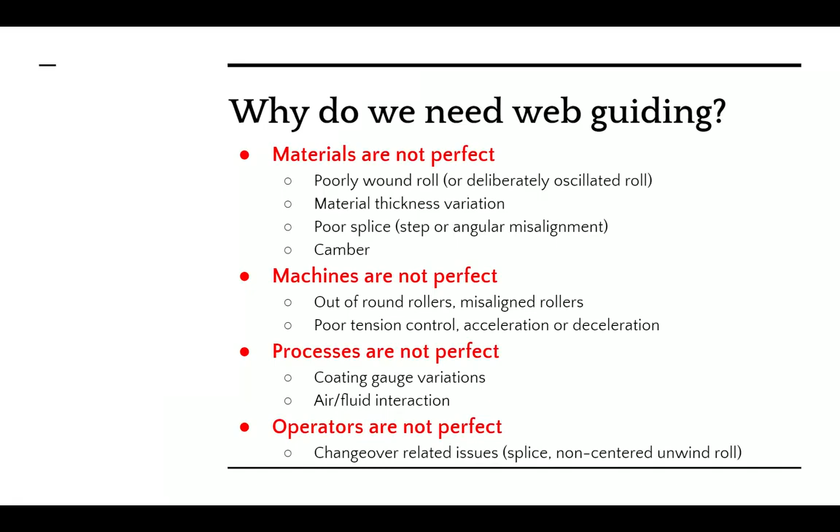Finally, operators, mainly when they are splicing the web or when they are putting a new parent roll into their roll-to-roll machine, they may not center it, or they may not put it at the right location. That might also cause an issue, and that might need web guiding. So web guides are necessary at different locations of the machine, because you might need alignment at different parts of the machine.

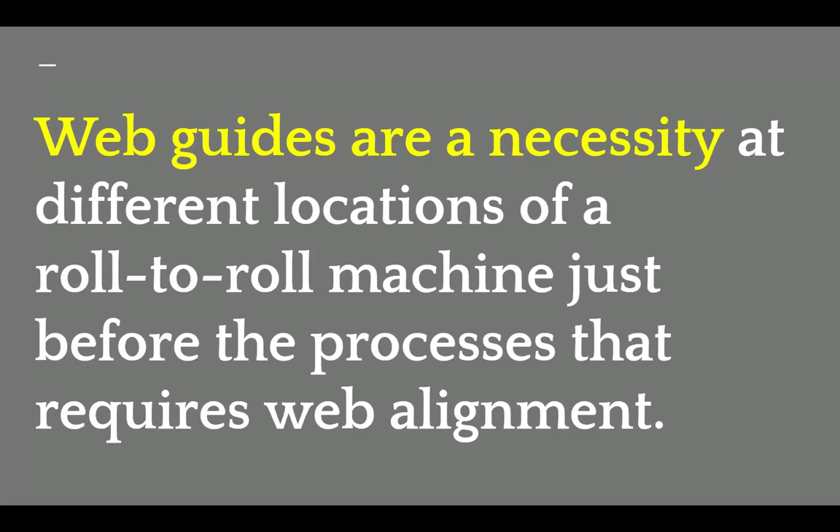That's the main thing with web guiding - you have to put a web guide in front of any process that requires web alignment. Just to give you an example, let's say you are laminating something, and you have two layers of web coming into this lamination process. At this point, you would need a web guide so that you can align this layer and this layer with respect to each other. The guides used within the machine are called intermediate guides, or intermediate to the machine.

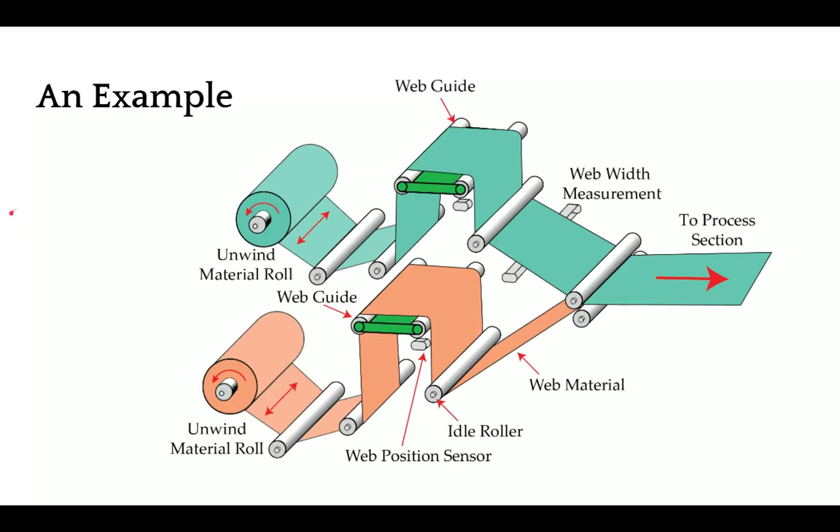And the guides that are used at the entry and exit of the machines are called terminal guides. So we're going to look at all of these in detail, but that gives you an idea of why we need web guides and where we need web guides.

In terms of the location, when you have a web guide that is located at the entry and exit of the machine, they are called terminal web guides. There are lots of names for these, and some of the common names are shifting stand, shifting base, shifting sidelay, or roll positioning stands.

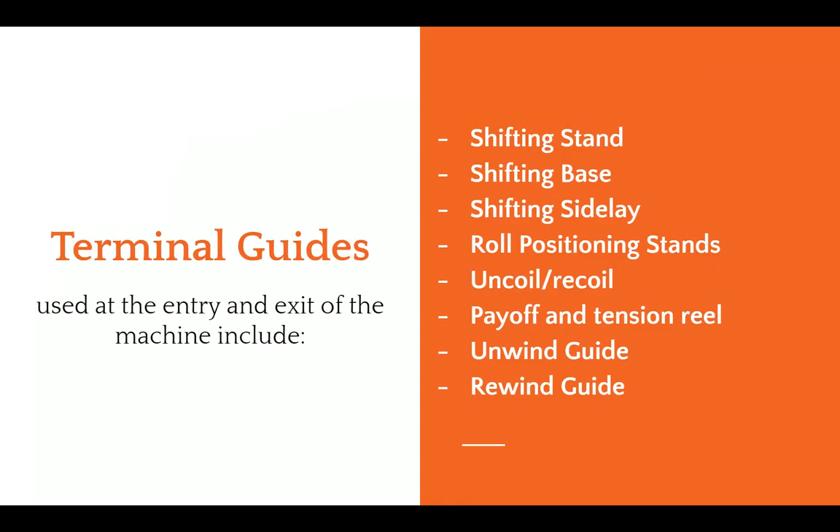If you're in the metals industry, it might be called uncoil or recoil, and in other industries, it might be called payoff and tension reel. Specifically in these presentations and in our terminologies, we call them unwind and rewind guide. An unwind guide is at the entry of your roll-to-roll machine, while a rewind guide is at the winder or the exit of a roll-to-roll machine. So these are some of the terms used for terminal guides.

In terms of intermediate guides, these are the web guides used within the process, within the machine. There are certainly multiple types of these web guides, and the most common one is what is called an offset pivot guide. Other names for offset pivot guides are displacement guides, positive displacement guide, pivot frame, or table guide. The second most commonly used intermediate web guide is a remotely pivoted guide.

That's a technical term, but most commonly it's called a steering guide, steering roller, or swivel roller. And then there are other less common web guides like end pivoted guide or center pivoted guide, and even turn bars are all available. We'll take a little bit deeper look at all of these different kinds as we go along in this presentation.

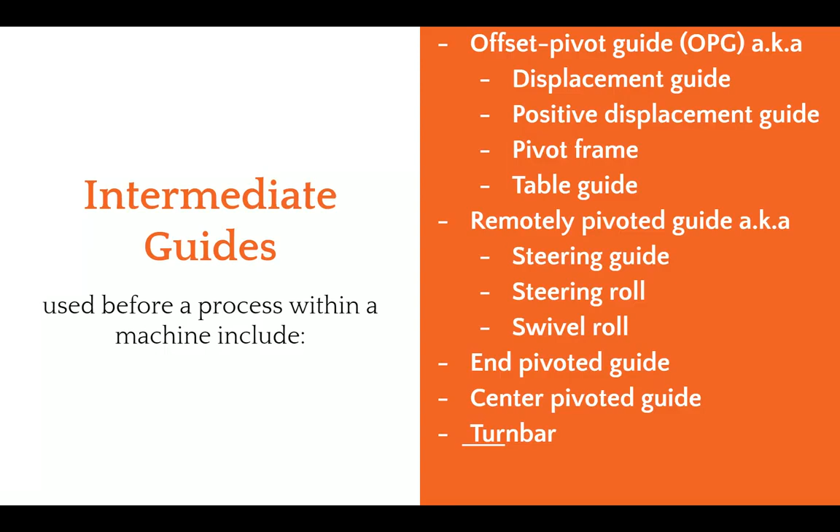But most of these web guides work on a basic fundamental principle, and that is what we call normal entry. So what does normal entry say? Normal entry is basically that a web approaching a roller will always align itself perpendicular to the axis of rotation of the roller. As you see in this video right here, let me restart that.

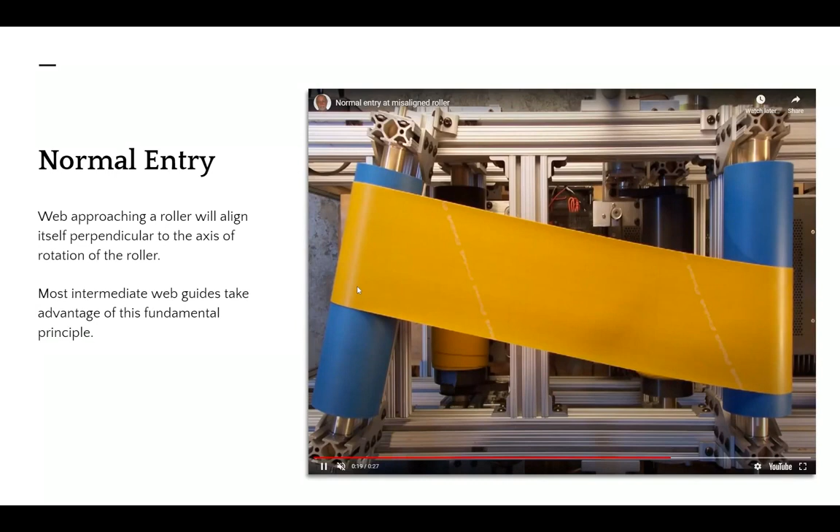As soon as the roller on the left has a misalignment, the web started to track and it started to move in such a way that it will approach the roller on the left perpendicular to the axis of rotation. This is the fundamental principle used in most of the intermediate web guides that we are going to see. What's happening here is that the web is essentially behaving like a beam, and the angular displacement on this left hand side is bending the beam, and that's what is causing the web to track to this side.

There are lots of dynamics involved in this process. How fast the web moves, how much does it move? All of that depends upon the transport conditions, what type of web it is, what kind of traction you have, and things like that. And obviously, the static behavior is that at steady state, once this angle is set, how much is it going to move? Are we going to see any movement on this side?

As you can notice, when this web moved, the upstream roller, the web was still there. It was maintaining there because it was able to have enough traction so that the lateral forces or the moment that is acting there was not able to make the web move.

And whenever we have a motion like this, bending occurs. Bending in turn means that there are stresses developed in the web. So you're going to have a tight side and a slack side, and there's going to be a tension profile here. So these are important to understand for us in order to have a successful web guiding application or execution of a web guide.

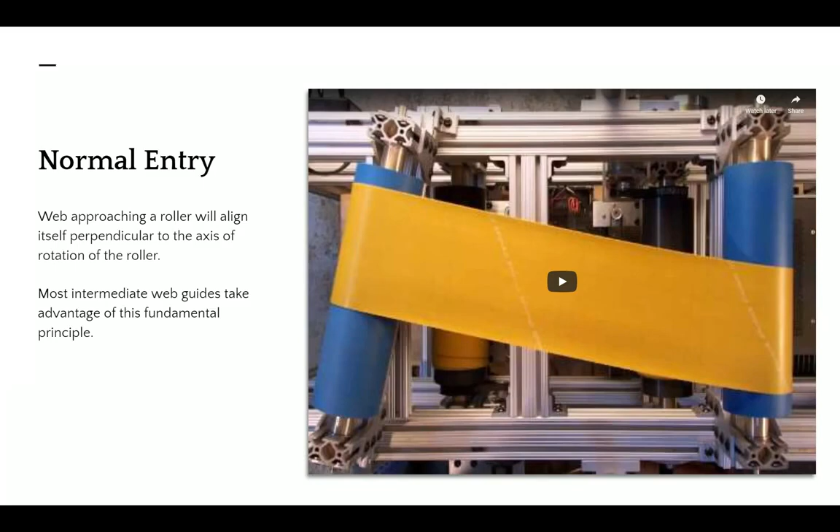So in terms of a basic web guiding system, we are mainly dealing with four main items. Apart from the web, we're mainly dealing with four main items.

One is the guide structure or the mechanism. This is the device that is actually making contact with the web, and that's the one that needs to be moved, or it moves the web. There are different types of guide structures that we will go through.

The other component of a web guiding system is an actuator. So an actuator is something that takes an electrical signal and then converts that into physical motion so that it moves the guide structure so that the web can be located at the desired location.

The third and one of the most important components of a web guiding system is a sensor. The sensor is the device that provides the feedback. The sensor is the one that tells us where the web is, meaning it's inferring the position.

And then finally, that signal is sent to a controller. The controller is mainly the intelligence or the brains that takes that sensor signal and computes the corrective action that is required so that the actuator can move the guide mechanism to the location where we can get the desired web position.

Again, another schematic of how the components of the web guide are. So the web is a part of the web guiding system, and then you have the mechanism. There's an actuator inside the mechanism. The sensor gets the position feedback of where the web is, sends that information to the controller. The controller then computes an error and it sends the command to the actuator so that the mechanism can be moved to position the web at the right location. So this is a closed loop feedback control system that is a main part of a web guiding system.

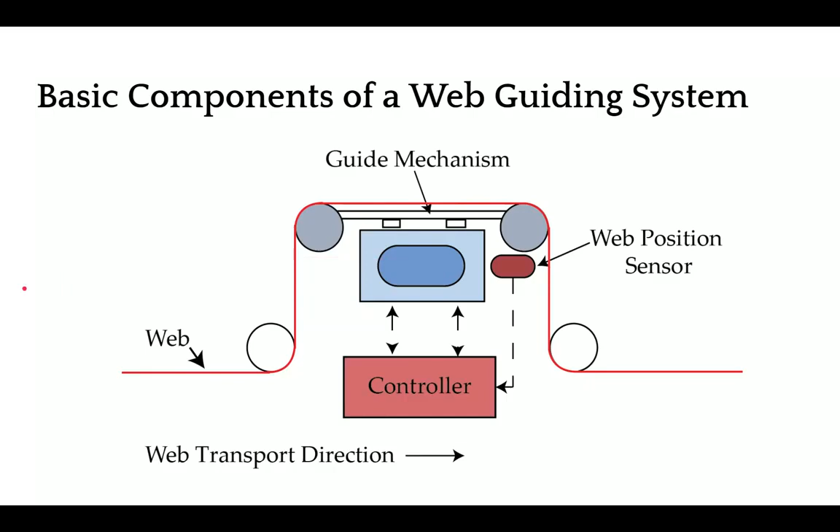So let's dive into detail about different components of the web guide. First, we'll start off with guide structures and look at how guide structures are with different types of web guides that we saw. So first and foremost, we have the unwind web guide structure.

In this case, you have a parent roll, and that is feeding the web into your machine. And this roll is on a shifting stand or a base that is supported by typically linear bearings. And then there's an actuator there that connects the moving stand with the fixed base. And then there's a sensor here that is looking at the position of the web.

So the main objective of an unwind web guide is to ensure that the web that is fed into the process is at the desired location. And because of that, you have a fixed sensor that is fixed to a machine frame. And then this stand actually moves in and out of the monitor that we have here. It's going to go in and out. And the feedback from the sensor is used to make this unwind guide move in and out so that it can position at the right location.

One thing I wanted to point out is that there is a shifting idler. When I say shifting idler, it means that this idler is attached to this moving base. The main reason why we do that is that if we put a sensor right here, it is not an ideal location, just because of the fact that when the diameter of this roll changes, you're going to have the web plane go in and out.

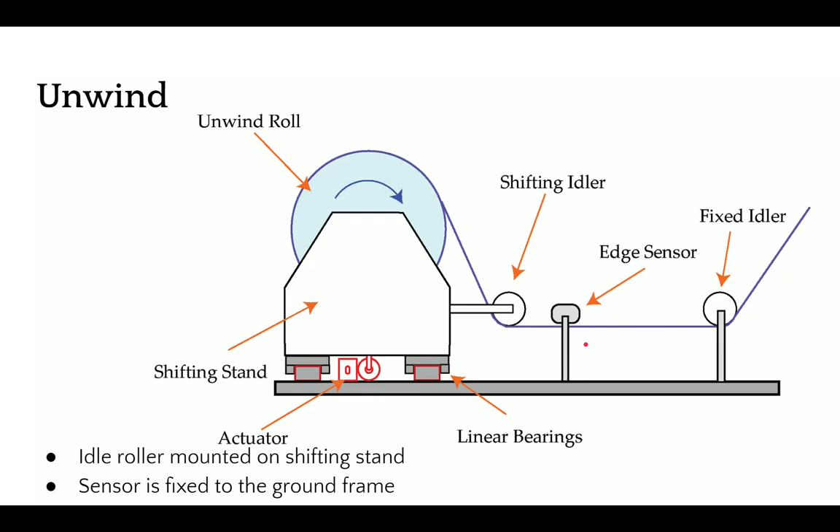And if that happens, that's going to affect your guiding. So typically you would see a shifting idler. It doesn't have to be one, it can be multiple. It could also be a whole frame with a lot of rollers here. All that we need to do is put the sensor just downstream of the last shifting idler, and then the sensor is fixed to the machine frame so that we can guide the web. So those are the main things with an unwind guide.

Now, when we look at the rewind guide, even though we call it guiding, it's not actually guiding the web, it's actually chasing the web. So the main thing that is unique about this is that in a rewind system, you have a sensor that is attached to the rewind frame. All of the things in terms of the carriage are exactly the same. You have a sensor that is attached to the rewind stand so that when the rewind moves, the sensor also moves. And then you have a fixed idler right after this moving sensor.

The main reason why we do that is that we need to maintain the relative position of the web and the rewind roll. If we put the sensor on a fixed frame and look at this rewind roll, then we would not know the relative position between those two. That's the main reason why we attach the sensor onto the moving rewind stand, so that the sensor gives us indirectly the position of the rewind stand, and the objective is to make sure that we move the rewind stand so that the middle of the sensor, or the guide point of the sensor, matches the location of the web. Again, it's not really guiding the web, we are chasing the web so that the rewind roll would be at the right location to get the web wound properly.

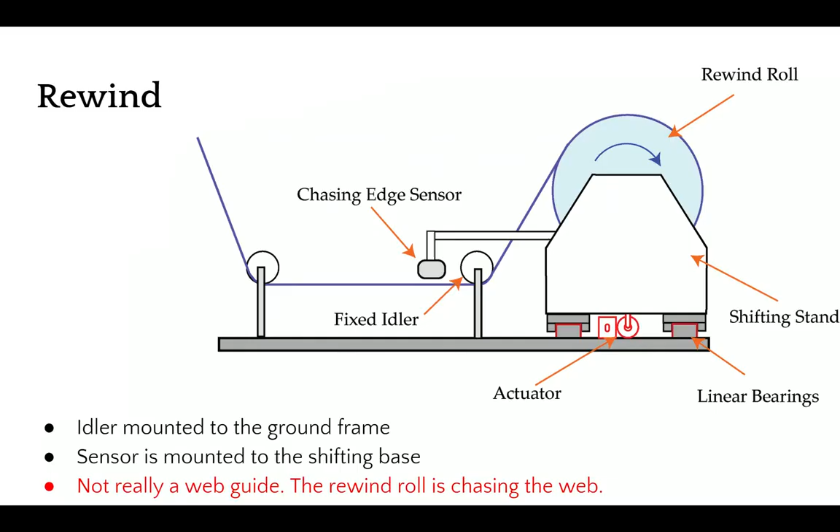So just to summarize about these two terminal guides, we can look at what are the things that we need to have a good rewind or unwind guiding system.

First of all, in terms of design, we need to make sure that the mechanical structure and rigidity and stiffness are designed properly. We are moving a big mass, and depending upon the type of web, maybe metals, it may be thousands of pounds, multiple thousands of pounds that we are trying to move. We need to make sure that the structure is rigid enough so that we can avoid any mechanical resonance. The natural frequency of the structure should be at least 3 to 4 times the operating frequency of the control system.

The other thing we need to consider, especially with these kind of guides, is that we need to size the actuator properly. When we talk about sizing the actuator, it should have enough thrust so that it can push the mass, enough thrust to overcome the static friction, and also enough thrust to provide the desired acceleration to reject the disturbances or errors that may be there. Just like the mechanical structure rigidity, we need to also make sure that the actuator coupling and the actuator stiffness are all accounted for. Any play in the actuator coupling is going to reduce the stiffness of the overall system. That's going to destabilize your system.

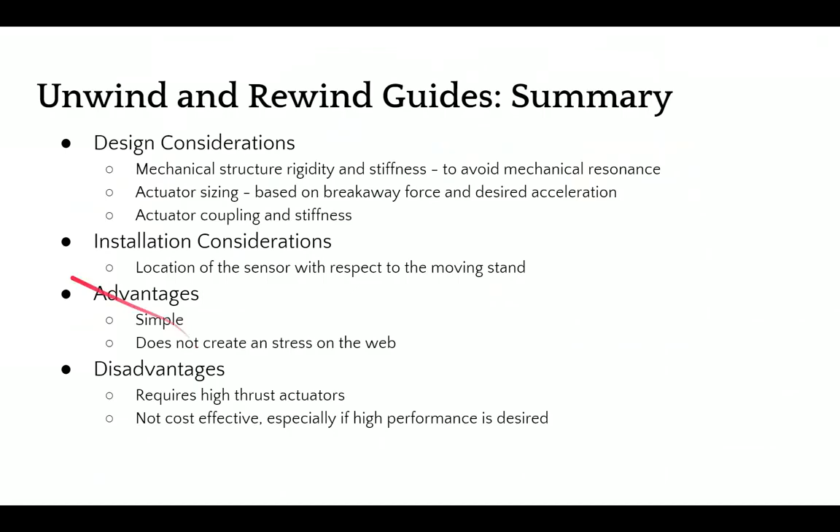The disadvantages with these kind of web guides: first of all, you need a high thrust actuator, especially when you have larger mass to move, and it's not cost effective if you really want good performance from a web guide. If you want to reject a high frequency disturbance, then this might not be a good choice for us. Now, moving over to intermediate web guides, we have a displacement web guide.

This is another type of one of the most commonly used web guides that you're going to see, and we would recommend this as the first choice for any web guiding application.

And if the web guide is designed properly, then these web guides can have a 1-to-1 ratio, in the sense that if you move the web guide 1 unit, then the web will actually move 1 unit. So that's why we call them a perfect web guide.

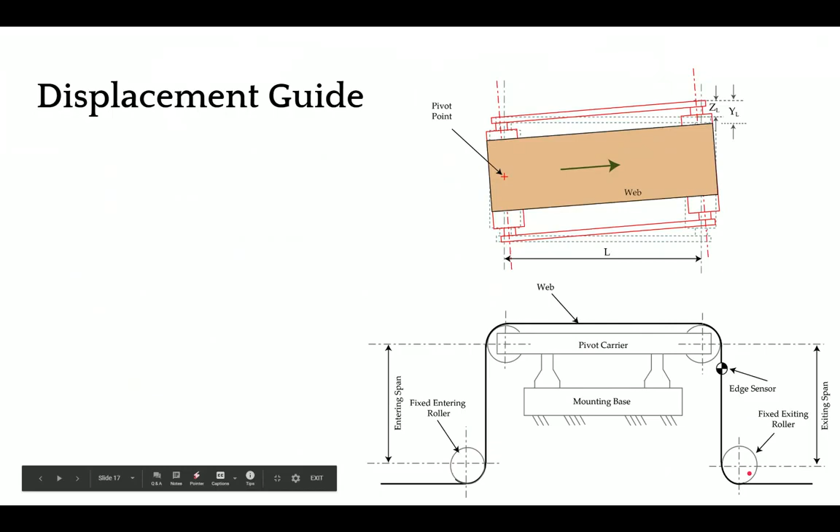Just like I explained, because these two rollers are parallel to each other, there is no bending in the span. And since these entry and exit rollers are perpendicular, or the wrap angles are perpendicular, this span is perpendicular to the plane of motion of the web guide, they are going to be in twist. So there's no bending, and when there's no bending, there's no normal entry coming into the picture there.

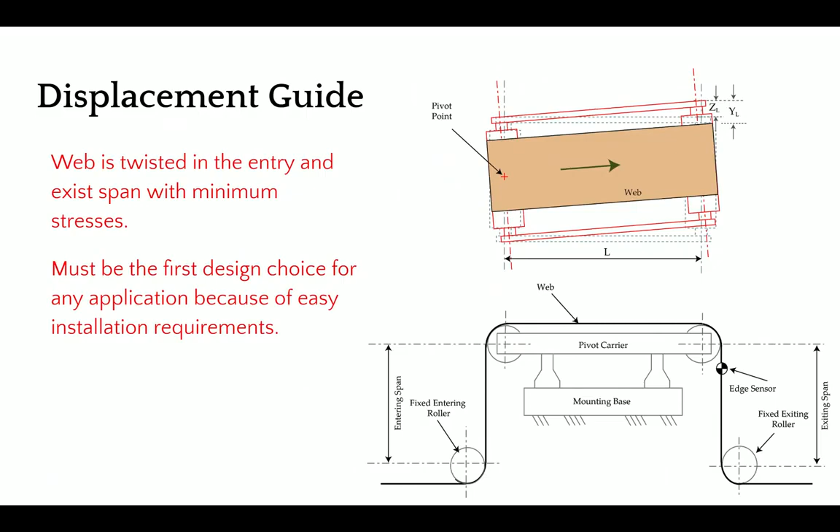So like I mentioned, the twist is an important design part, and this would be our first choice in terms of applying it in any web guiding situation.

So in terms of installation, we want to make sure that we have a 90-degree wrap at the entry and exit of the roller. And then there are some considerations on what is the span length at the entry and exit. Usually you can get away with half a web width. Usually we recommend about 1 to 2 web widths if possible. And if you have a stiffer web like metals, you might need a much longer entry and exit span.

We want to locate the sensor as close as possible. This is true for any web guide, it doesn't matter if it's a displacement guide, unwind guide, rewind guide, any web guide. We want to have the sensor as close as possible in the span where the guiding action takes place. In this case, the recommendation is to be within the first half of the exit span. And then how long this span really depends upon how much correction you're looking for.

Typically, these carriages are allowed to pivot only about 5 to 10 degrees. So if you want larger correction, then you can make these spans longer. The main thing is that you need to make sure that the plane of motion of the carriage is perpendicular to the entry and exit span so that you can create a pure twist on these spans. And then as long as these rollers are moving in tandem or parallel to each other, then we will have the desired effect. They don't have to be on the same carriage. They can be on different carriages as long as we are able to have them parallel to each other.

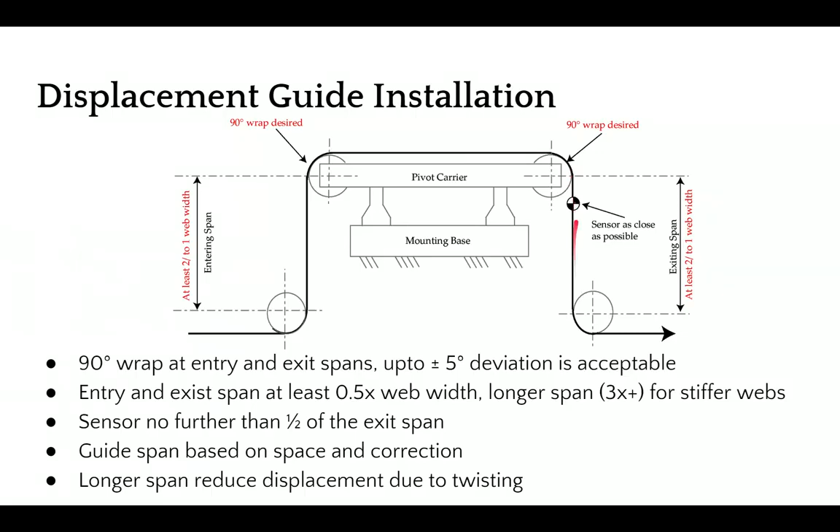You can even have a process here. You don't really have to have just 2 rollers, you can have multiple rollers. So it provides a lot of flexibility here. And the guiding action is actually happening in the exit span.

So what not to do? We don't want to install the sensor too far away, or in the next span. This is mainly for control system purposes and stability. So when the web guide makes a corrective action, that action is not seen at the sensor immediately.

So if you're running really fast, you might get away with moving these sensors a little farther down. But if you're running slow, whenever this web guide moves, you would see that motion if the sensor is as close to the exit roller as possible. If you install it here or here, especially when the web stops and there is a small error, the web guide would keep moving and that might cause the web to break or have unintended consequences. So we don't really want to have the sensor further away or in the next span.

We also don't want to have a scenario where you have an angle that is not 90 degrees. If you have a 90-degree wrap, you have twist. As soon as you introduce something deviating more from 90 degrees, you start creating bending in the web. This bending is going to act as understeering the web, causing bending that understeers it, and it also causes distortions and guide instability. So we don't really want to have any of these conditions.

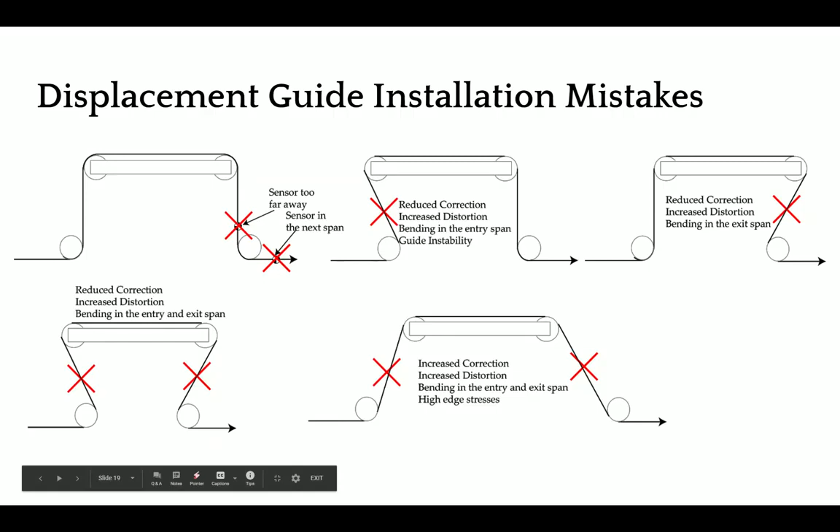But there are other options for wrapping the web. You don't have to have it just like we showed, an inverted U configuration. You can have the web go in like this or like this, a Z configuration, depending upon the space and other things. You can also rotate all of these 90 degrees upside down, so you would have about 16 different configurations you can do with these web guides.

All in all, you need to make sure that the entry and exit span are perpendicular to the plane of motion of the web guide. All of these configurations satisfy that. Also have the sensor as close to the web guide as possible. We can satisfy that, and then you can have multiple configurations for these.

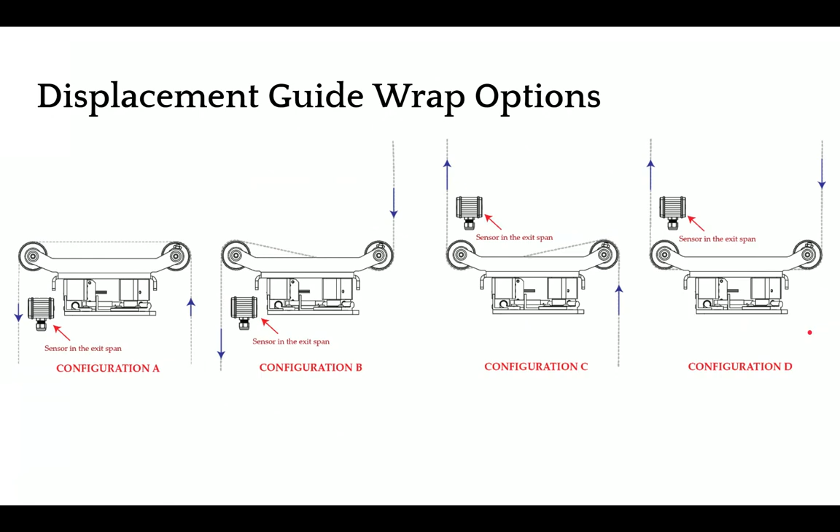In summary, for the displacement guide, the main design consideration when somebody is asked to design a web guide or displacement guide is what is the desired correction. That determines our span length for the guide span. Other than that, in terms of installation, it really depends upon how much space you have.

So you can design the entry and exit span, and if you have a stiffer web, you might have to exaggerate that entry and exit span to make sure we have a 90-degree wrap, then wrap the web guide based on the path. One of the other paths would be in the same direction the web came in, and things like that. Advantages: these are simple to install, proper installation imparts the least amount of stress on the web, and it's pretty versatile.

I put a disadvantage there, but it's really not a disadvantage. I do want to have that noted here: the maximum correction you can get is designed in. So in another type of web guide where we can take advantage of steering or bending, we can get more than what the guide moves.

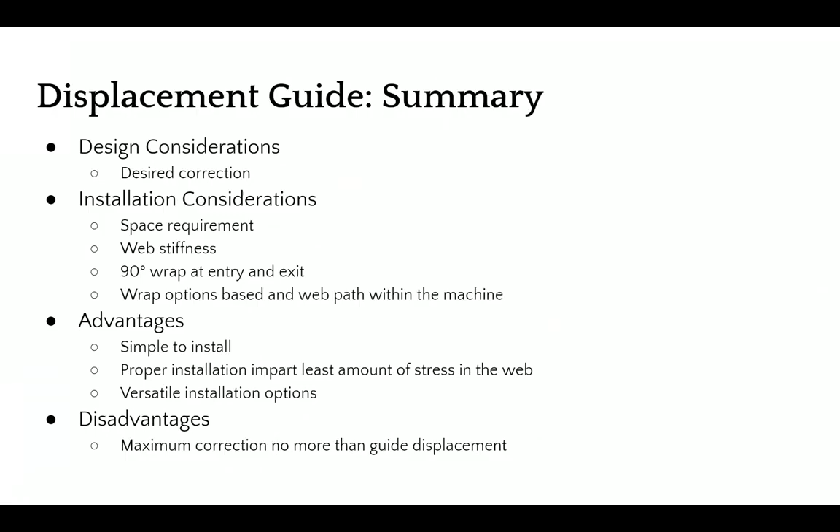So the second choice for us would be a steering guide, and in terms of how it works, it's a little bit different. You've got a single roller - this is the top view, and this is the side view. This roller is installed on two raceways that are at an angle, so the web guide actually forms an arc, moving back and forth.

That's how we are changing the axis of rotation. In this web guide, we are creating bending - there's a bending action here, it's displacing as well as bending. In terms of the entry and exit span, there are some guidelines for that as well, and we'll go through that.

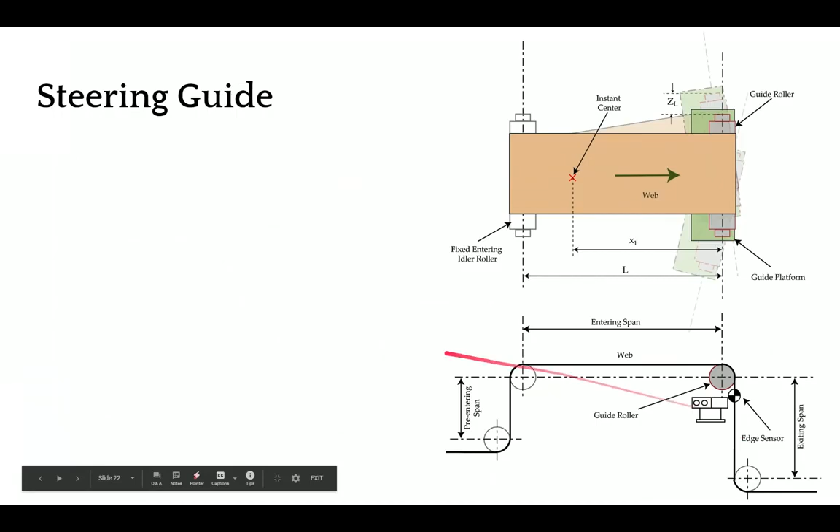This is not an ideal choice for us, or not our first choice, because as I said, it's bending, so it's introducing stress. If it's not installed properly, it can cause wrinkles, creasing, web tear, edge quality issues, edge stresses, and things like that. I just wanted to stop quickly and answer a couple of questions.

How do we determine the minimum entry and exit span? That really depends upon the stiffness of the web and things like that, the average stress. There are guidelines for that I can share later on, but it really depends upon the tension, the Young's modulus of the web, the width of the web, and the span length. There's a formula where we can get the minimum entry and exit span lengths.

And the entry and exit span need not be the same length - they can have different lengths. Also, how do you determine the correct length of the displacement guide table? The guide table length is basically based on how much correction that you need.

Usually the tables are made to rotate about 5 to 15 degrees. So the displacement needed would be: let L be the length of the span on the guide table, and theta the angle of displacement. The correction would be L sine theta, which is the maximum correction you can get. So based on the maximum correction you need, you can determine the length of the guide span on a displacement guide. Theta has an upper limit, we can say 15 degrees.

Switching back to the steering guide, in terms of installation, what do we need to look for? We need to make sure that the exit span is perpendicular to the plane of motion of the web guide. The main thing we're trying to do is make sure the exit span is in pure twist. This allows the least amount of stress in the web. Now the entry and exit span length also depends upon the stiffness of the web.

Let me talk a little bit about the instant center. Like I mentioned, there's a raceway, two raceways here, and they are angled so that you can have the web guide go around an arc. The center of the arc is called the instant center. This is important. We need to make sure that the instant center is within the span, at a certain distance, about half the length of the span, or up to 2/3 the length of the span.

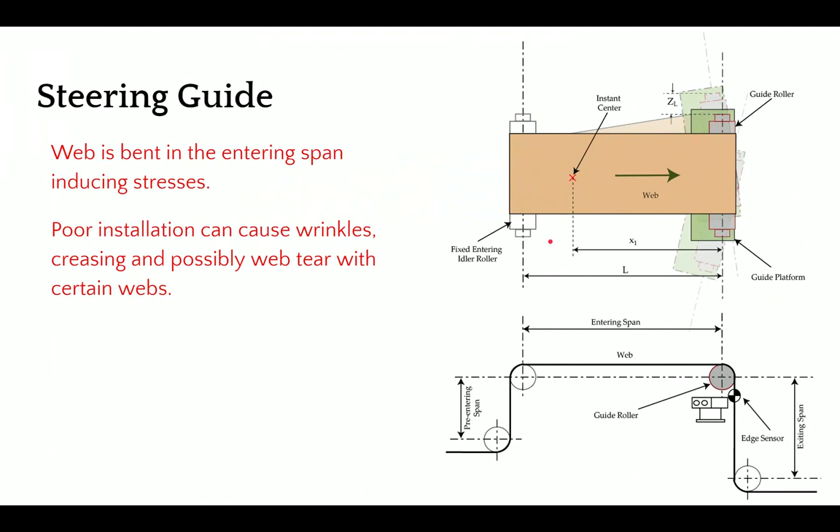Again, these are all numbers coming from the dynamic model of the web guide and the dynamics of the web itself. If you don't follow those conditions, you can have a web guide oversteering, understeering, creating an awful lot of stresses, maybe wrinkles, slack edges, tight edges, and all those kinds of things. But the main thing we want to look for is this angle.

Make sure it's 90 degrees, and then you have an entry span that is pretty long. You can have different wrap here. We don't want to go more than 45 degrees on either side. When you do that, you're adding twisting per se. So whenever it goes away from this 90 degrees, it's not pure bending - there is bending and twisting involved there.

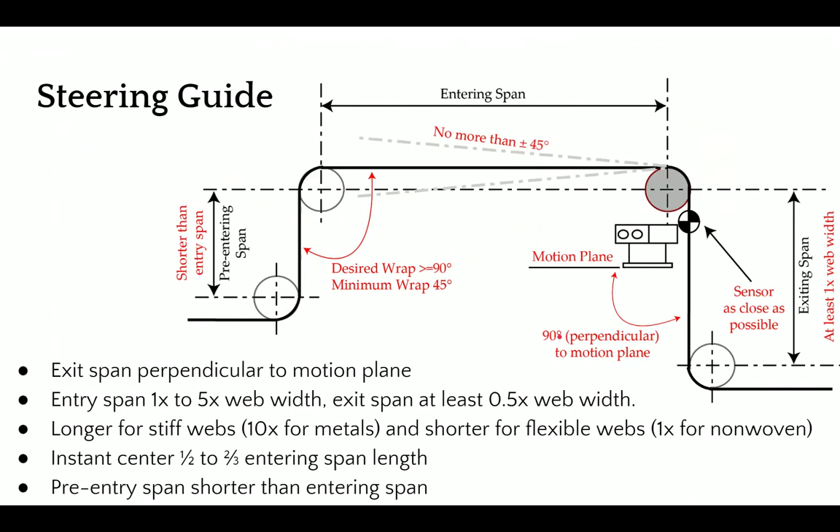We want to have an angle here because when you put bending stresses, you have the possibility of what we call moment transfer occurring. The motion of this roller can actually move the web upstream of the guide roller. In order to avoid that, we want certain conditions here, and we also want the span shorter so that it becomes harder for that moment transfer to occur. So those are some guidelines for installation of a steering guide - sensor as close as possible.

Now, what not to do? Same thing - we don't want to put the sensor too far away. One thing that's not really evident is that we don't want to put the plane of motion of the web guide at anything other than 90 degrees. It's not the angle between the entry and exit span that needs to be 90 degrees - it's actually the angle of the plane of motion of the web guide and the exit span. That's what determines whether you're going to have a twisting action happen or not.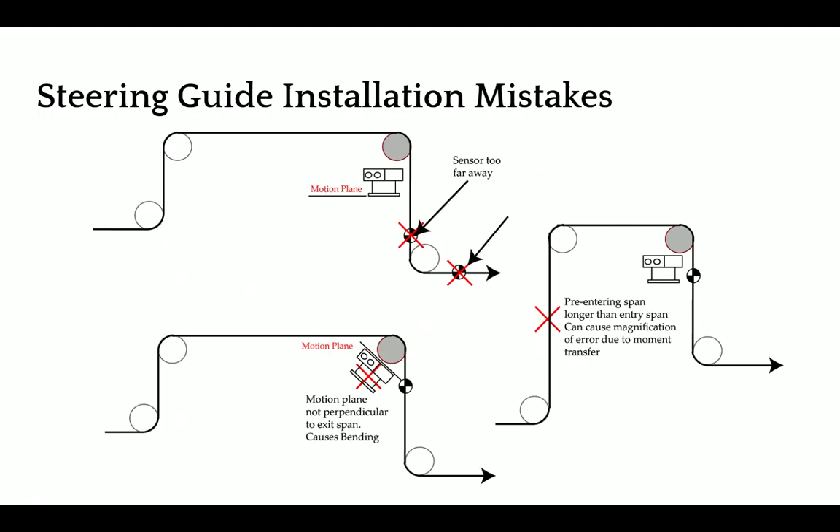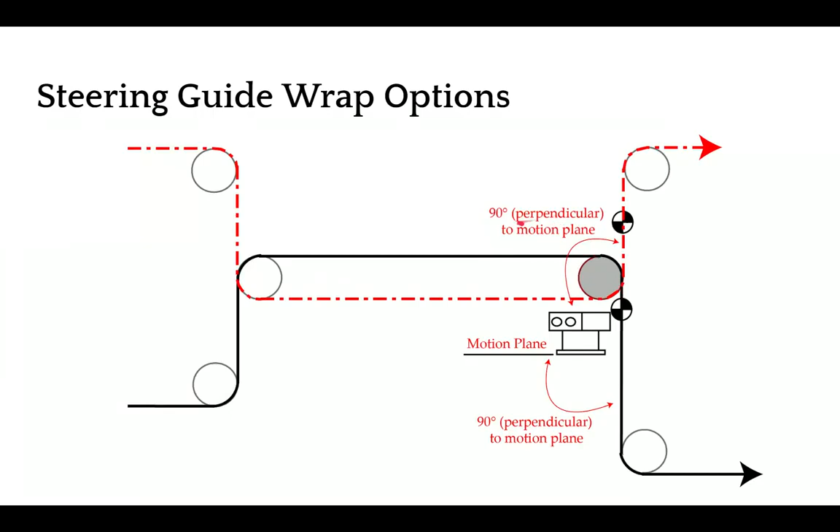In terms of wrap angles, pretty simple. You can have something going up like that or going down like that. As long as we follow this condition, that exit span is perpendicular to the plane of motion, then we are in good shape.

Just to summarize the design considerations, desired correction is one of the main things. And the raceways that we have on the steering guides, we don't want to angle them more than 25 degrees. Anywhere between 5 to 20 degrees would be the ideal range.

In terms of installation, steering guide is a lot more complicated to install. You have to consider the stiffness of the web that determines the entry span length, and you also need to make sure you're not putting too much bending stress on the web based on how stiff your web is, and the location of the instant center, which depends upon the raceway angles.

Again, that depends upon the length of the entry span. So there are lots of things going on here that we need to consider for proper installation of a steering guide. And that's one of the reasons why these web guides are prone to have a lot of issues because they're not properly installed.

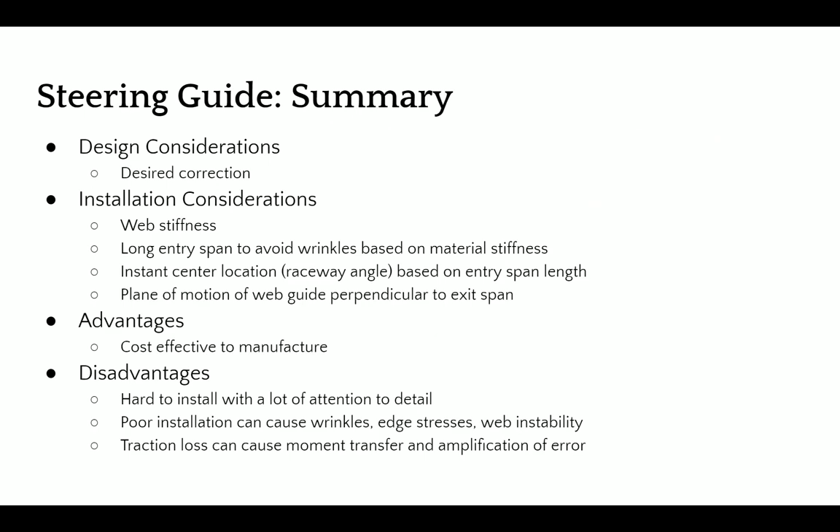In terms of advantages, they're simple, so they're cost effective. It's just a single roller, so it's inexpensive, but it comes with other things that increase the overall cost of ownership. It's hard to install. A lot of attention to detail is required, and especially because of the bending, loss of traction or any moment transfer occurring can actually amplify the error. So a poorly installed or poorly designed steering guide can actually amplify the error more than what it's intended to correct.

There are a few other types of web guides that are not used commonly, but there are center pivoted guides. Again, they use the normal entry rule to try to steer or guide the web, so there's bending that's going to happen. So we're going to have similar considerations in terms of entry span, pre-entry span, and exit span.

Because they don't have any displacement like in a steering guide, where you displace and change the angle of rotation, in these guides it's only the angle of rotation. They are usually really slow in terms of response. They're not an ideal choice in modern guiding principles, but the same design considerations have to be followed as in a steering guide.

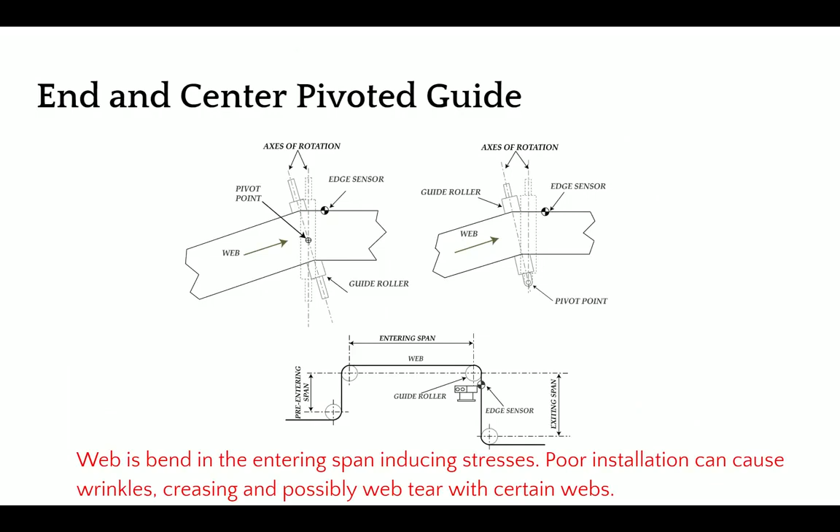So that gives us a quick summary about different web guides and how to install them and things like that. So the next part of web guiding is the actuators.

In terms of actuators, there's lots of terminology involved. Some of them are thrust or power, how fast the actuator is, what is the correction speed, what is the acceleration, stroke length, mounting, what type of coupling we have, and things like that.

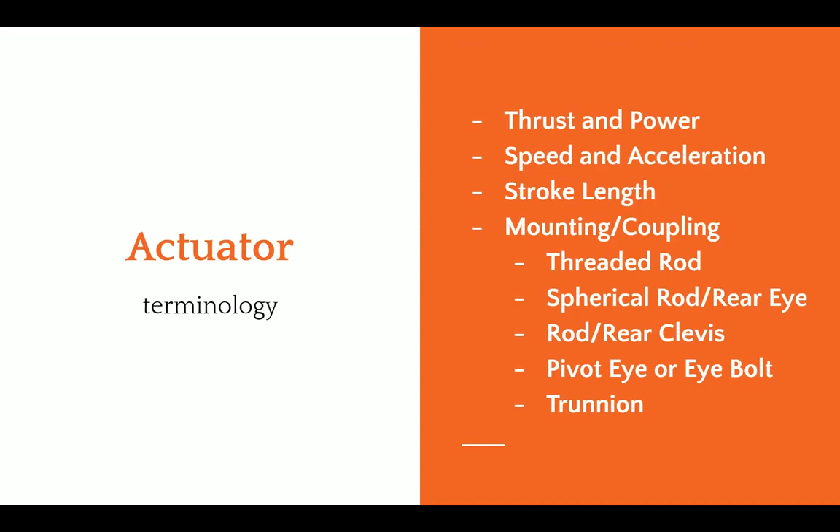Actuators are pretty common or pretty standard right now. It's not as important as installation of a web guide or the sensor, but it is an important part of a web guiding system. The older actuators were either pneumatic or hydraulic. You had a hydraulic pump pumping a double acting cylinder and moving the web guide structure. These were more common in the 50s and up to about the 90s, before electromechanical actuators started coming into the market.

So you could have pneumatic actuators or hydraulic actuators. The hydraulic actuators have the advantage that they can provide pretty high thrust and can shift large loads pretty quickly. Even now in the metals industry, hydraulic actuators are pretty common, you can see them. But the problem is maintenance. You need to balance the valves and stuff like that, change the filters.

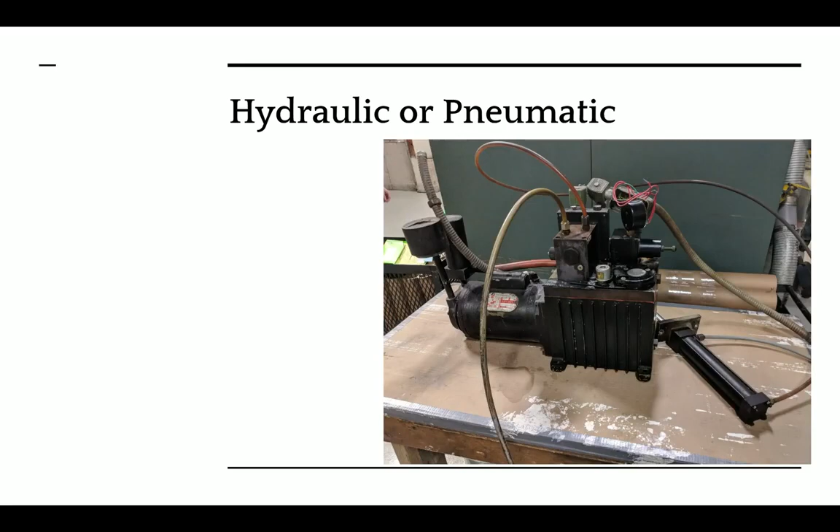These actuators usually have a motor that drives a belt-pulley kind of system, and there's usually a lead screw, ball screw, or roller screw that converts the rotary motion into linear motion at the end of the actuator.

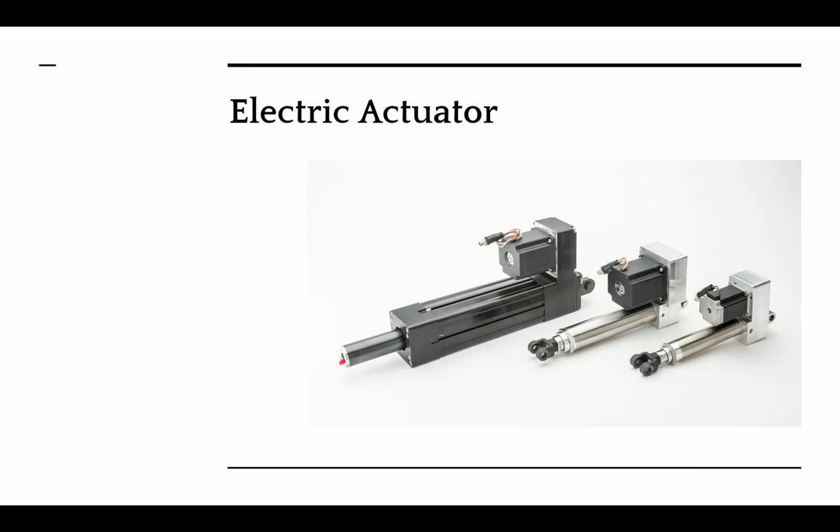Some common terminologies you'd see with actuators are maximum current, voltage, power. Whenever we have something with a lead screw or pitch, that's a common term: lead of the actuator, pitch of the actuator, gearing ratio. Backlash is another thing you'd commonly see with electric actuators, especially low end lead screw actuators. And resolution - what is the smallest movement an actuator can produce.

That's another term. Backdrive is a common terminology you'd see, especially if you're installing a guide that has to work against gravity. Then types of actuators - you have inline and reverse parallel. Some actuators have limit switches or end stops. And type of motor used in the actuator - you'd commonly see servo, stepper, brushed or brushless DC motor.

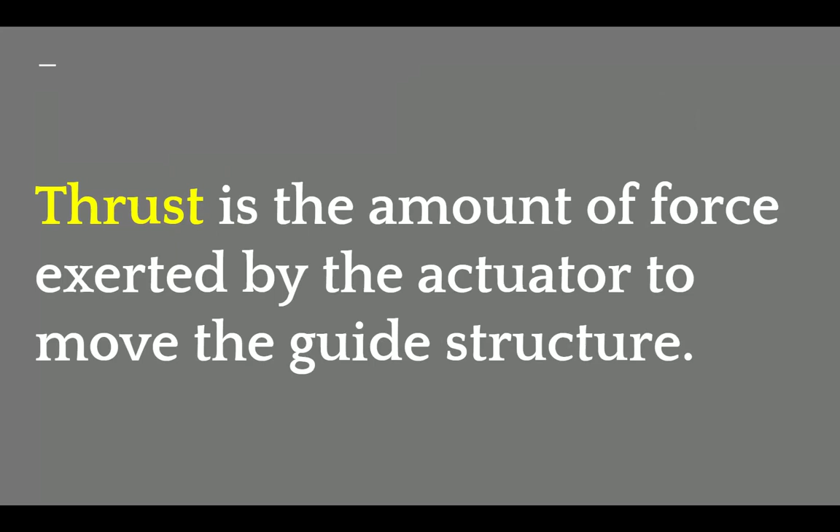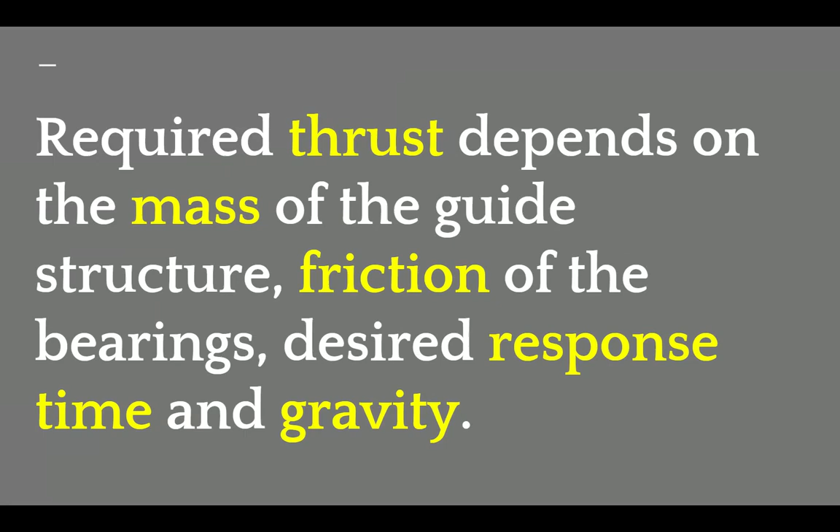So actuators are providing the driving force to the guide structure so that it can position the web. In terms of thrust, that's the amount of force exerted by the actuator to move the guide structure. This thrust depends upon, as we saw before, mass of the structure we're trying to move, what is the friction there, how fast you want to move, and sometimes gravity as well, if you're acting against gravity.

In terms of sizing actuators, these are some of the things we would need to know to size an actuator properly: web line speed, mainly because if you have a slow moving web...

...the maximum disturbance frequency you can get really depends upon the speed of transport of the web. So if you're just moving at 100 feet per minute, you might not need a high dynamic response, while if you're moving at really high speed, you might need a much higher dynamic response. That's the main reason why we need that. The dynamic response is related to the acceleration, and acceleration is related to the thrust. So that's why line speed becomes important.

Guide structure weight and roll weight - again, if you're trying to move a big mass, we need to know what type of bearing you're using, so we know the breakaway force we need to overcome based on the coefficient of friction of the bearing. And then what kind of disturbances we are trying to correct for.

Again, like I said, there is a correlation between the amount of disturbance that can propagate through a roll-to-roll machine. That really depends upon the speed of the web - the faster you go, higher frequency disturbances can go through. So the web acts like a low-pass filter. And then the acceleration, and then if you have to look at any gravitational effects - these are some of the key factors involved in properly sizing an actuator.

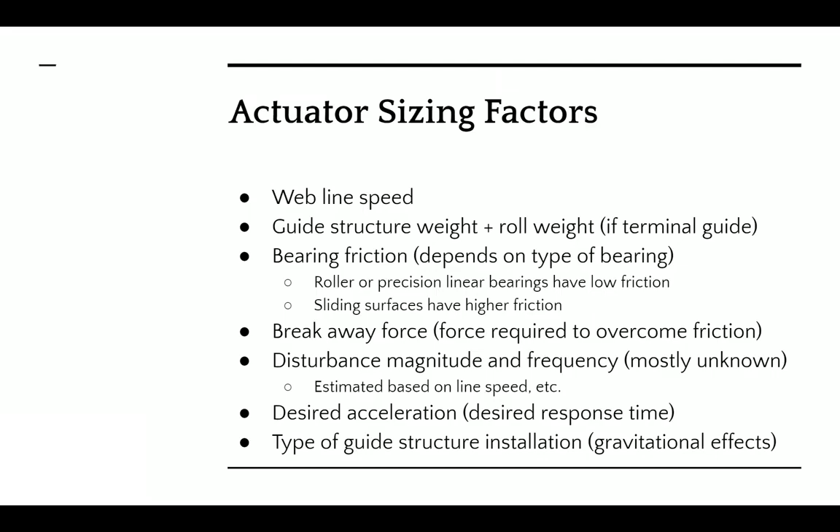One of the most important parts of a web guiding system is the sensor. It is important because what you can't measure, you can't control. So if you have a poor sensor and you're not able to measure the position properly, then there's no way that we can get the accuracy that we need.

In terms of sensor terminologies - range, resolution, accuracy, linearity, those are some things you would see. Type of sensors - infrared, optical, ultrasonic, air - type of things you're trying to look for in terms of web position. Are you trying to look at the edge of a web? Are you trying to look for a line on the web or a contrasting feature on the web? How fast can the sensor measure?

Pass line and plane change - these are not important nowadays, but older ultrasonic sensors have issues with pass line changes, so you can't have the web too close to the ultrasonic emitter because it might reflect the sound waves in a way that doesn't provide an accurate measurement. And then temperature drift - again, ultrasonic sensors can have issues with temperature drift when the piezoelectric crystal frequency changes, and then what kind of signal output you get from the sensor. That's some of the terminologies.

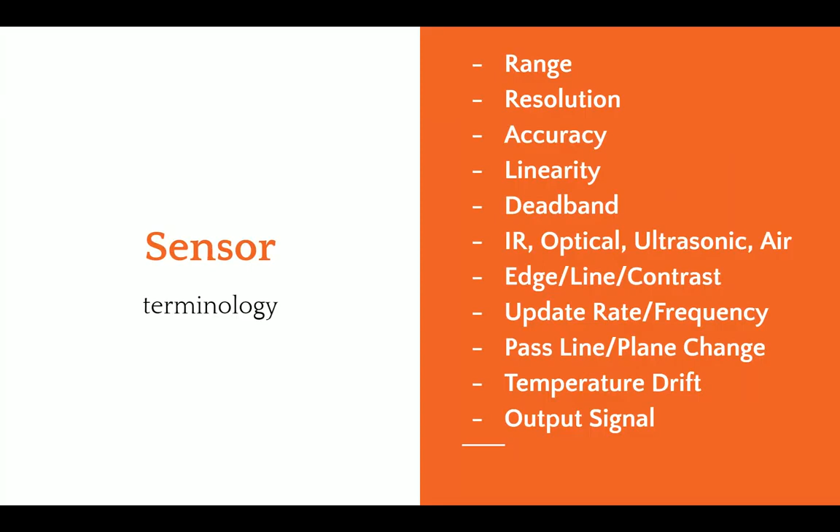Essentially, range of a sensor is the maximum lateral displacement that the sensor can measure. Most often for web guiding applications, range is not that important just because of the fact that you're going to bring it in. But it does become critical when you have web width changes and things like that. So most often, range is how much change in the lateral position you can measure with the sensor.

Resolution is the minimum lateral position change that the sensor can see. So if you want to guide a web to 5 thousandths of an inch, then you better have a sensor that can have 4x or 2x higher resolution than the guiding accuracy.

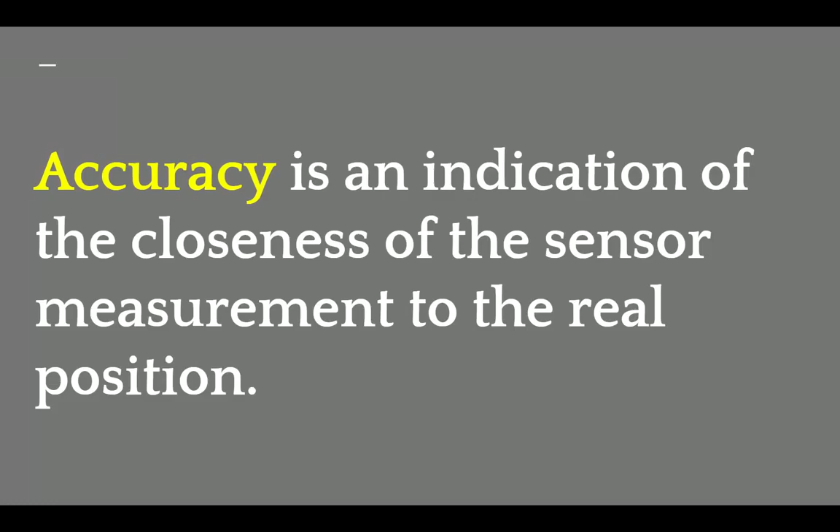Accuracy is basically an indication of how close the sensor measurement is to the real position. This becomes important for certain types of sensors that are affected by material properties like opacity, porosity, and things like that. So this is an important characteristic of a sensor.

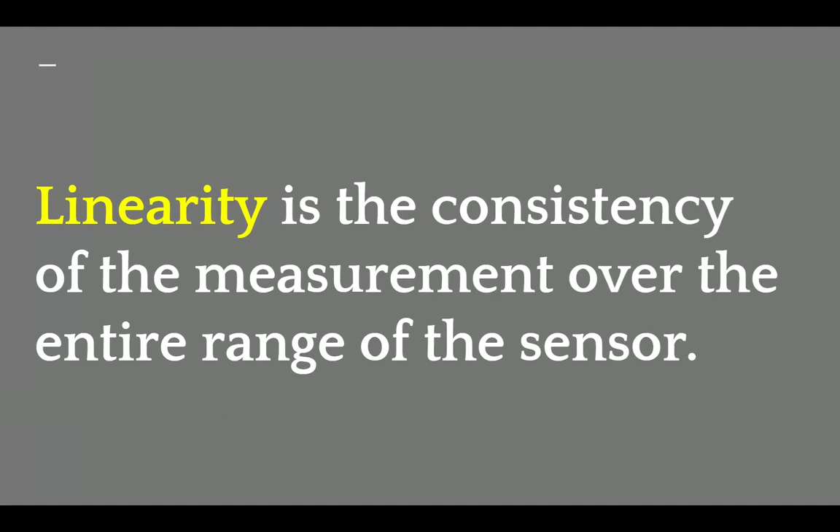And then linearity is how consistent your measurement is with respect to the actual position across the entire range of the sensor. That's what linearity means. So in terms of sensing, why is it important?

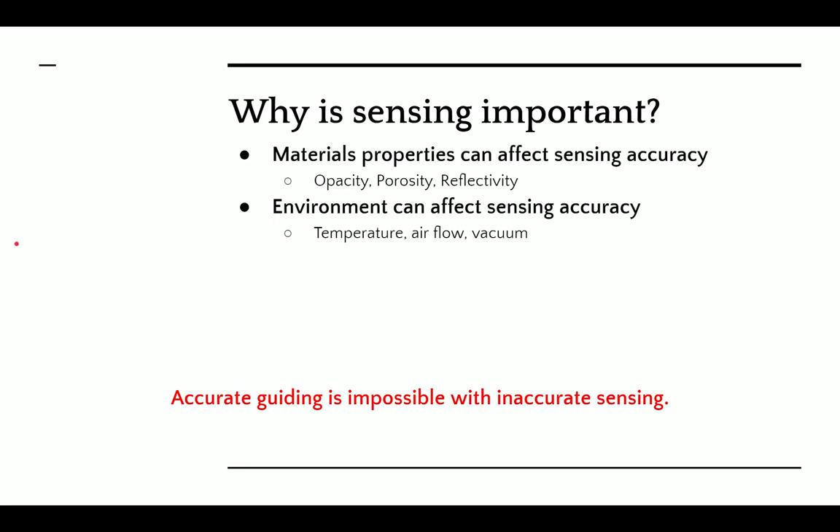Some sensors have issues with material properties like opacity, porosity, or reflectivity, or they may be affected by environmental issues such as airflow, temperature changes, or vacuum, and things like that. If we can't measure, we can't control. So that's why sensing is an important part of having good guiding performance.

Most often you would see these types of sensors referred to as opposing beam, fork style, or horseshoe style. There are lots of different names for it. Basically how this works is you have one arm emitting a certain type of signal and the other arm receiving that signal, and the web that goes in between it blocks it. It's a pretty simple sensing principle, and it works well for a lot of different cases.

The problem happens whenever, depending upon this type of sensor signal that you have, if the web allows that signal to leak through when it's blocked by the web, that's where the problem occurs. We talked about linearity, resolution, range - all of those things are affected by this kind of sensor whenever that change occurs.

This sensing signal can be air, it could be optical like visible light or infrared light, or even UV light, and then it could also be sound like ultrasonic. It really doesn't matter. What matters in terms of how well you can guide is whether this material is opaque or porous to that signal.

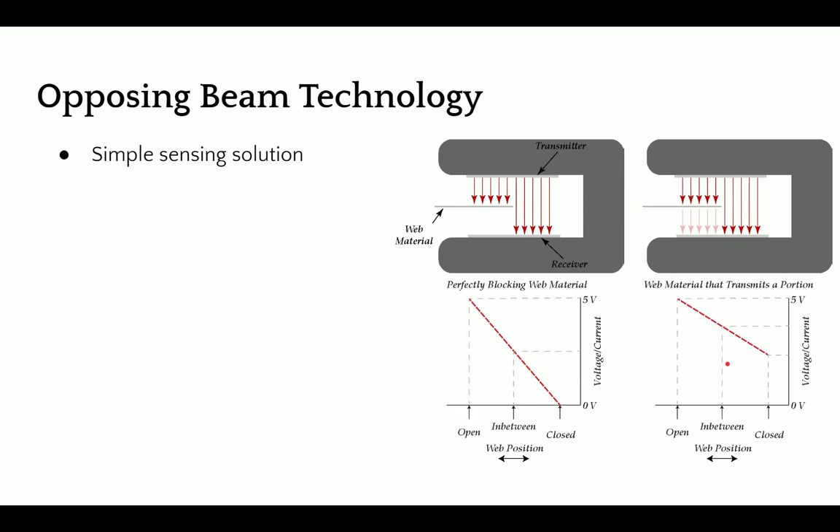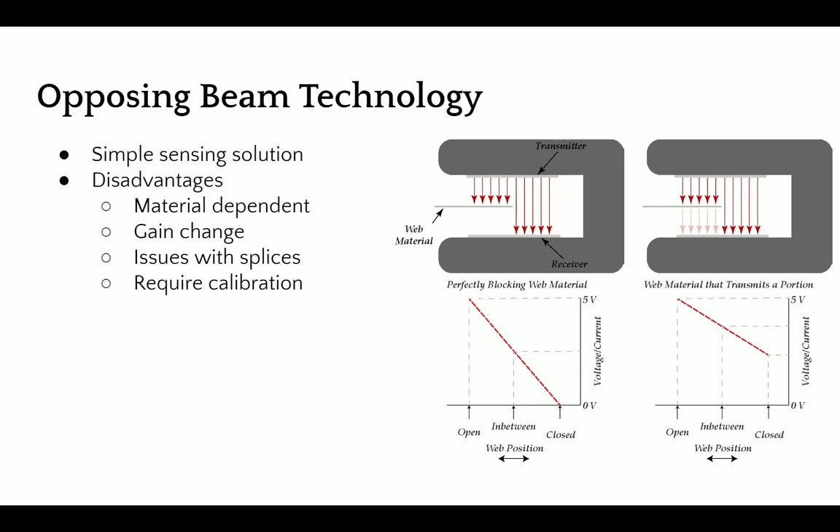Often manufacturers recommend different sensors for different materials and different conditions. So you will have a plethora of sensing technologies out there. The main disadvantages are that it's material dependent, gain change occurs, and it requires calibration if you want to get really good guiding performance.

There are other sensor technologies out there, like ours, which are not affected by material properties and some environmental conditions. I'm not going to go into detail about our sensor technology here, but just going to give you a quick overview.

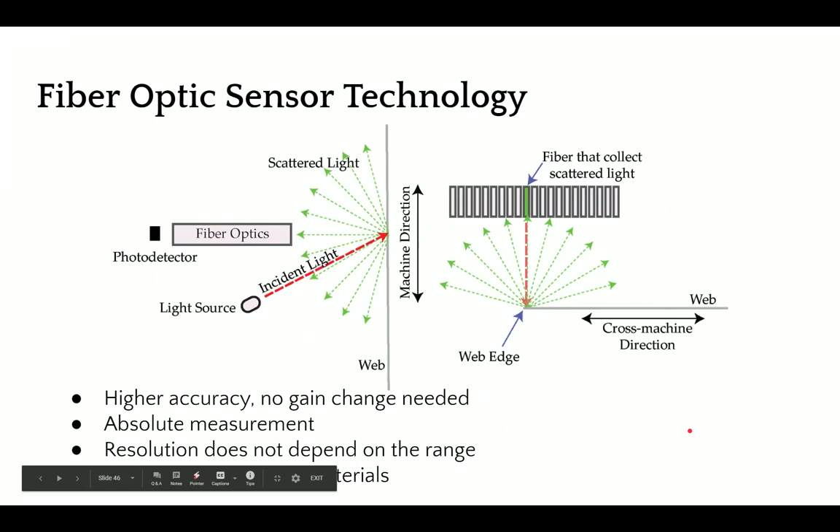Basically a high accuracy, direct measurement or absolute measurement, and our resolution does not depend upon the range, and it can work with any material. I'll give you some resources at the end of the presentation so that you can take a look at our stuff. So that's the sensor.

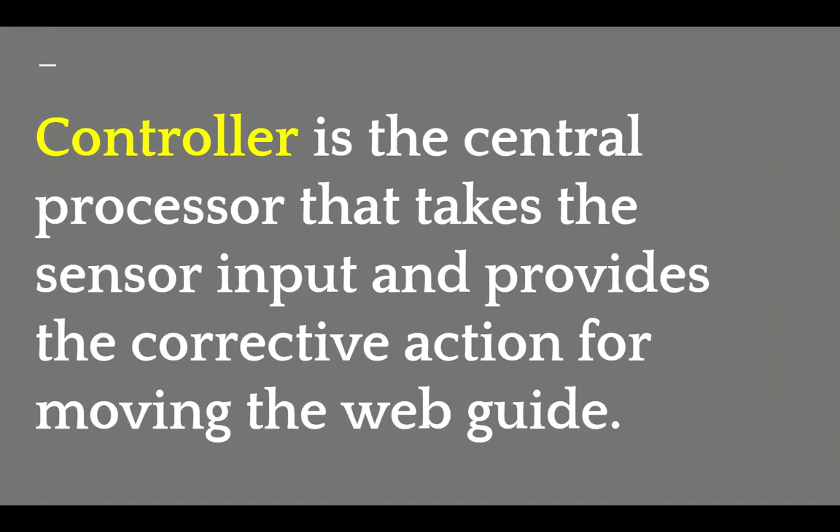So finally, the final component of the web guiding system is the controller. The controller is basically the central processor that takes the sensor input, computes what the corrective action needs to be, and then sends that information to the actuator.

Nowadays, controllers also include a human machine interface, like an operator interface, but previously the controller could be standalone. It didn't really have an interface, and even the controller could be analog, in the sense of electrical analog or pneumatic analog controllers. So basically, the controller is taking the sensor signal and making the necessary computation so that the actuator can be positioned at the desired location.

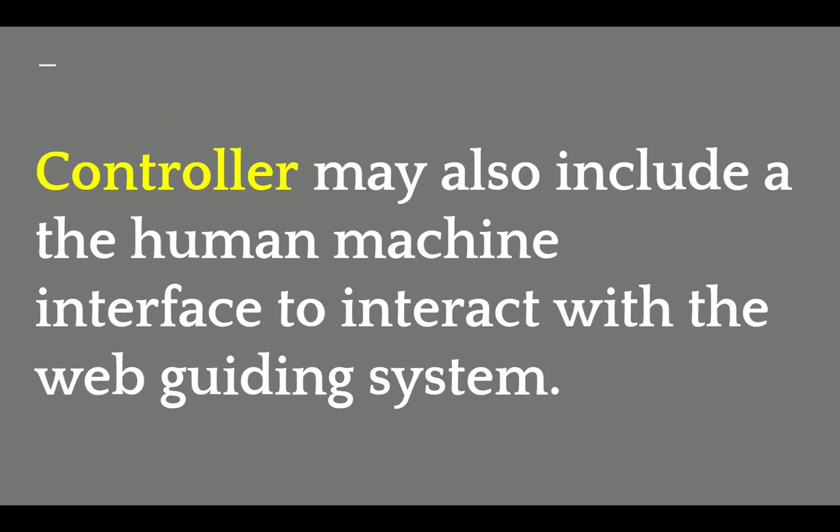In terms of terminology, gain is one of the most common things that you're going to hear about in controllers. That's basically saying how quickly, or what kind of dynamic response, that you need. That's what the gain is going to do.

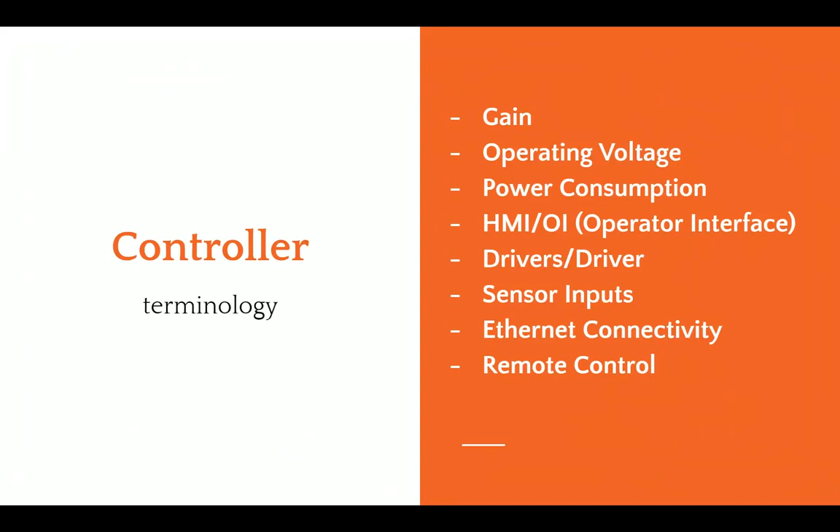Other things that you're going to see are operating voltage, power consumption, whether you have an operator interface or not, and whether this is a controller for a servo motor or stepper motor - they have drives or drivers for it. How many sensor inputs you have, does it have Ethernet connectivity, does it have remote control, and stuff like that.

In terms of the control structure, most web guide control systems have this kind of structure where you have a fixed gain proportional control. You really don't need anything more than a proportional control for a web guide because there is an integrator built into it.

Usually you have a motor that might have a current loop, it might also have a velocity loop with a tachometer or something like that. Then you have a guide structure which has its own transmission ratio. And there's the web dynamics, which is unknown - meaning that if you move the guide 1 mm, how much is the web going to move? That really depends upon transport conditions, the stiffness of the web, tension, and those kind of things. Finally, you have a sensor that measures the edge position, and it sends that to a position controller that drives all of these loops.

So this is a pretty simple architecture for most web guide controllers. They are fixed gain, and most often they are detuned because of stability and other reasons. Most web guides have their controller kind of detuned for the conditions. If you want to get the best out of it, you would need to retune them, and the tuning has to be based on optimal performance because the web dynamics is unknown.

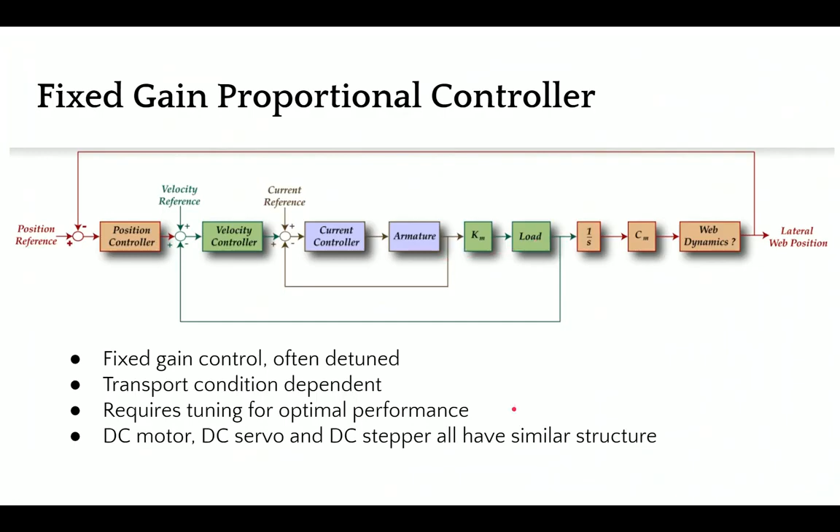Most often, DC motors, DC servo motors, or stepper motors are used in this kind of control structure - it's pretty common. There are some other advanced control technologies, like adaptive control, where the controller can adapt or learn on the fly, and tuning may not be required. Learning on the fly means it adapts to sensor gain changes, or the dynamics of the web, and those kind of things. It's possible to have a controller that can adapt.

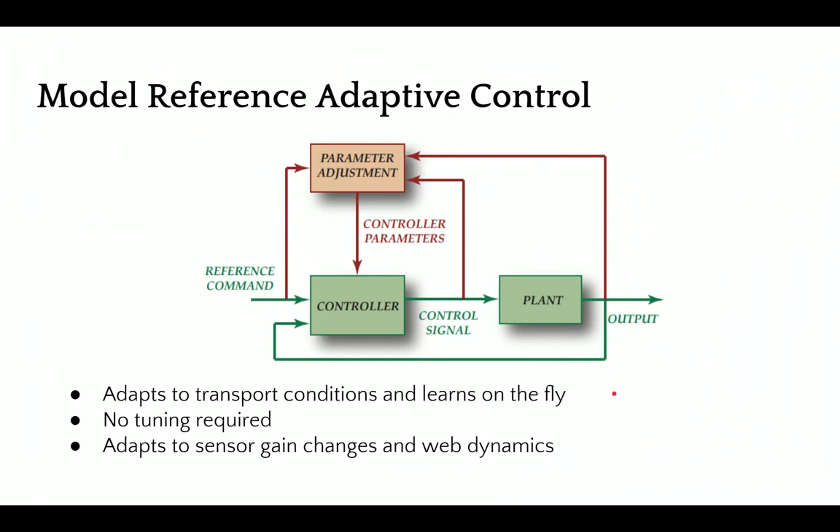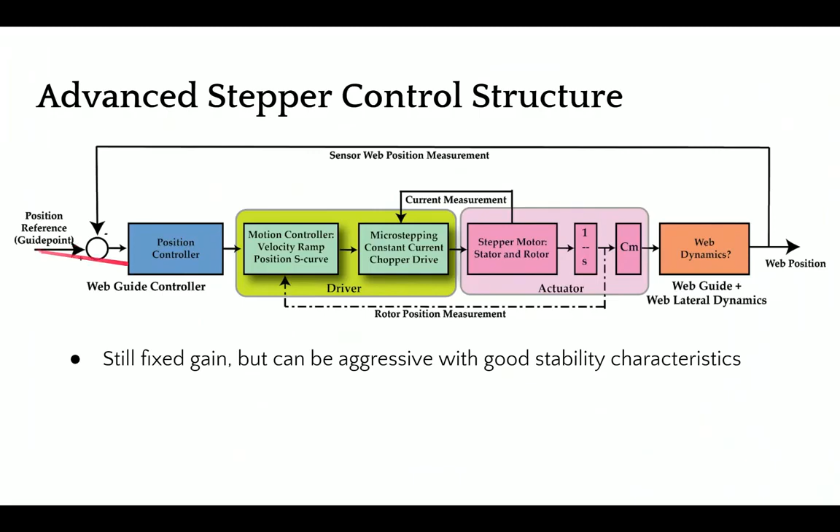In our case, we have a pretty similar structure as the one I showed first. It's still a fixed gain controller, but with some motion control aspects built into it in terms of S-curving the position and having trajectories for velocity. We can increase the stability of the controller and provide pretty aggressive output performance. Again, pretty similar - you can have a current loop, a position loop if you have an encoder, and then position of the actuator, and finally the web position, which includes the web dynamics.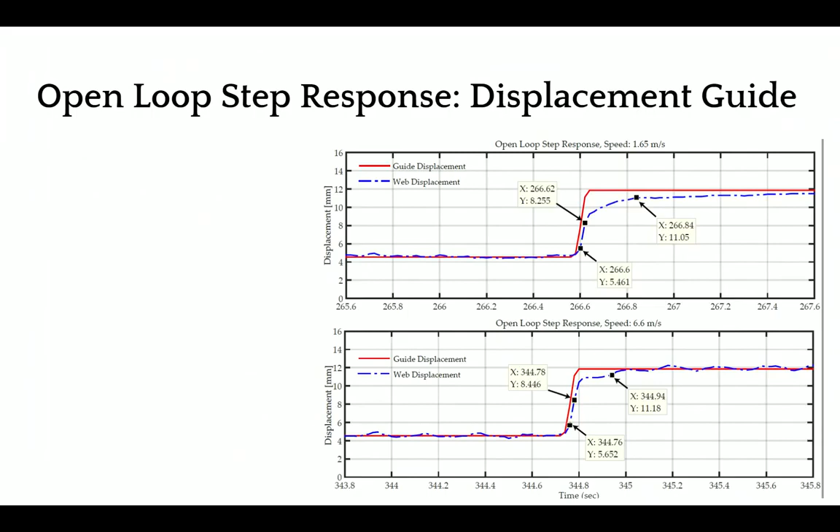This is the final part of the whole web guiding thing, which is the dynamics of the web. Now, if we add a controller to it - and this was our controller - we can have a much better response, and we can actually push the web guide. In this case, at the two different speeds we were running at, this was the reference change, and this was the actual response of the web guide at the sensor. Then when we have another sensor installed one span downstream, you can see how long it takes for that to go through.

Again, when we have a step response, we were able to get up to about 170 millimeters per second, or about 7 inches per second. This is close to a 70% improvement over an open loop response, and again, this is closed loop - meaning you are actually actively guiding the web. So with a proper control structure design, you can get a high bandwidth system close to 6 hertz or something like that, and still get a well damped system, so you can actually have an aggressive correction if you need to.

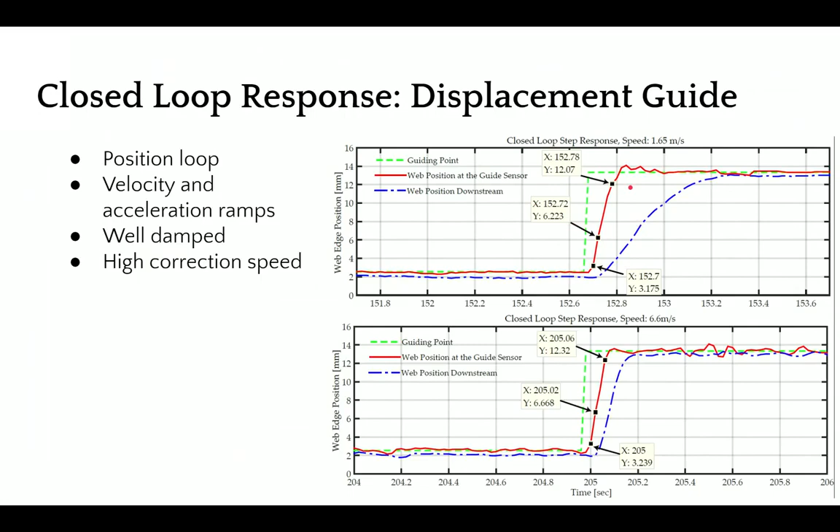In terms of the characteristics of a good web guiding system - it should have the ability to attenuate disturbances, be easy to tune, obviously needs to be stable, have good processing power so it can process multiple sensors, have industrial Ethernet connectivity for advanced functionalities, and smarts and intelligence for Industry 4.0.

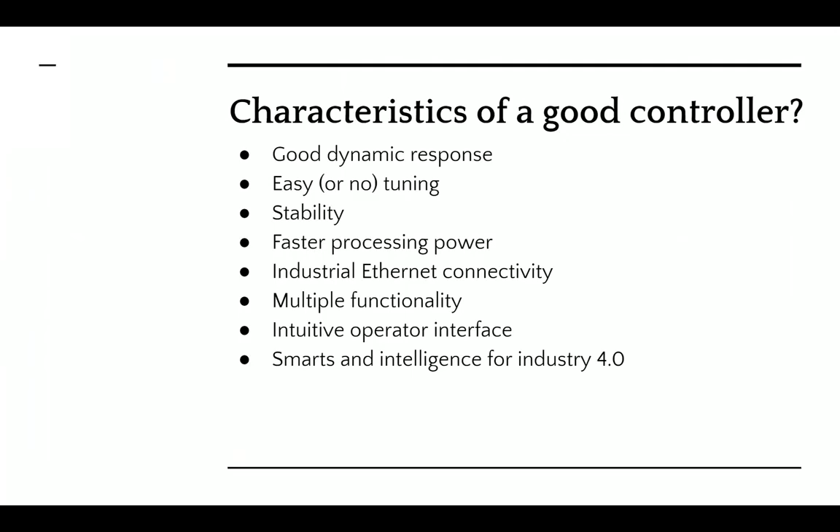So the final question here is, well, you have a web guide, and we talked about all these different things - what is the accuracy, or how accurately can you guide a web? It actually depends.

There are lots of different parameters that are going to affect the accuracy of the web guide. If you're just dealing with steady state error, we can expect plus or minus 0.25 millimeters. If you have a good machine and a perfect material, this is what you can expect. Higher accuracies are possible, like in printed electronics, you can get much higher accuracy. But again, if we're dealing with steady state errors, with a good edge and all those kinds of things, this is possible.

But the problem is that most web guides are going to run into transient errors. These are either disturbances or materials, or material properties that are going to affect the disturbance of the web guide. If you're trying to correct a transient error, it really depends upon the magnitude of the error, the frequency of the error, and so on.

Another important thing to consider is that these transient errors can actually propagate downstream of the sensor, called weave generation. Even though you correct it at the sensor, you don't really know the angle at which the web is approaching, and that can cause what's called weaves downstream. Again, you won't have good guiding performance if you have wrinkles.

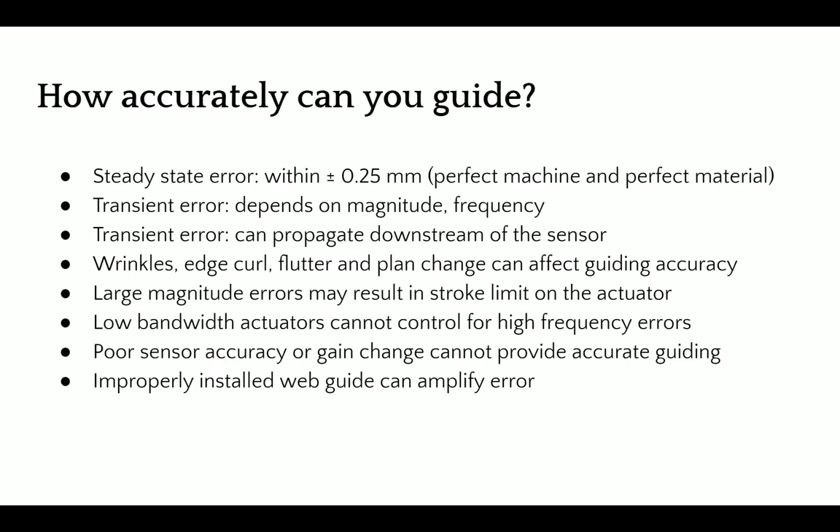And with the sensor, if you don't have a good sensor or if it has gain changes, then you can expect poor guiding performance. And then improper installation can actually amplify the error, so that's another thing we can expect.

So just to summarize the factors affecting this: we talked about machine related, process related, material related, and web guide related factors, like stroke, deadband, actuator backlash, correction, stroke limit, and things like that.

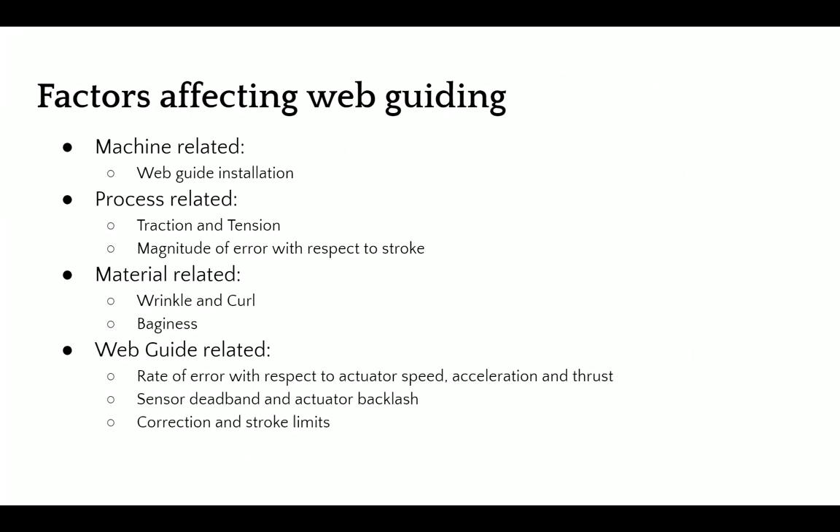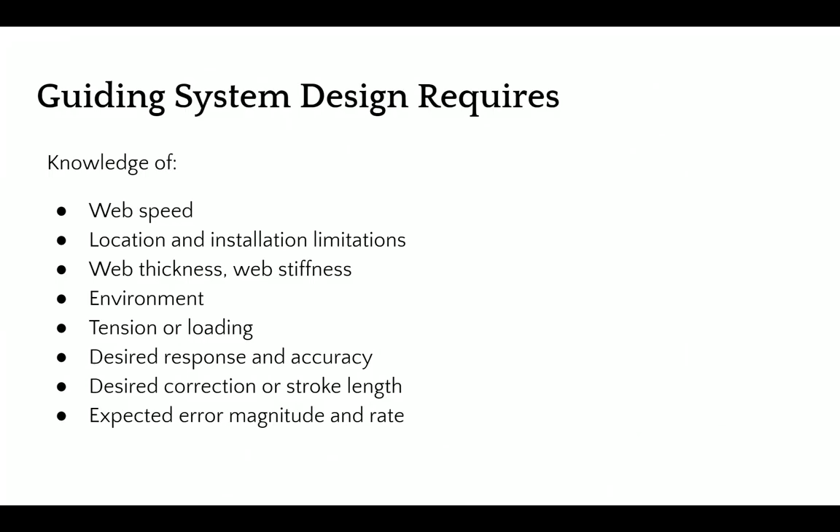In terms of design requirements, a good knowledge of conditions like web speed, location, thickness, stiffness, environment, tension, desired correction—all of these are important for us to have a good, well-designed web guide. And obviously, if you have a good understanding of all of these, we will do well.

I know we're running out of time. This is my last slide, and I just wanted to bring this up to summarize. Just to summarize our fundamentals of web guiding: webs, machines, processes—nothing is going to be perfect, so we need web guides to correct for it.

Most of the web guiding, or the traction or steering of the web, happens because of the normal entry rule. So whenever you have a misaligned roller or an out-of-round roller, all of those things are going to affect the disturbance created within the machine.

The sensors, when installing them on a web guide, need to be installed as close as possible to the web guide. And then the web guide has to be located as close to the process that needs alignment. We cannot have an unwind with a guide on it and then ten spans later have a process where you need the alignment. We need to have the web guide right next to the process where the alignment is needed.

None of these actions of the web guide will have any effect if we don't have traction. Traction is directly related to tension, so if you don't have good tension or traction between the web and the roller, you cannot expect good guiding performance. Proper installation, depending upon the type of web guide we have, is important.

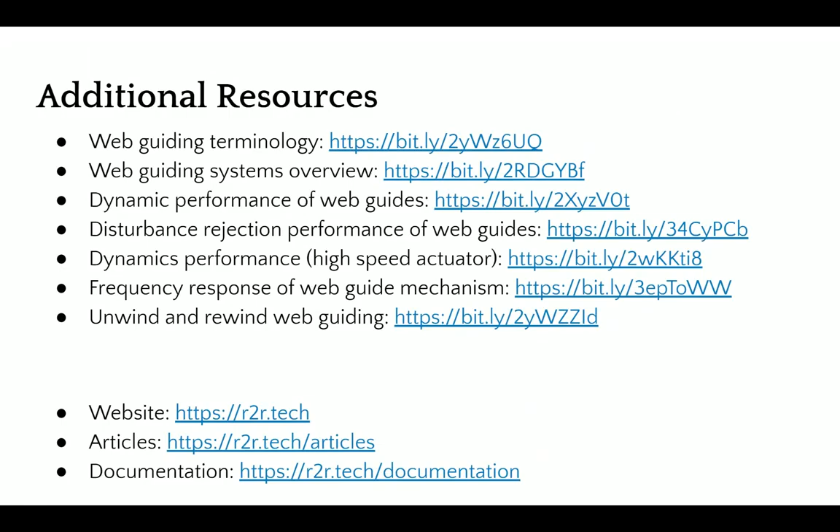Well, there are times where you have gauge band variation, meaning the thickness of the web across its width is different. This is especially true when folding the web, like in shrink sleeve applications. If you guide the web at the same location, the gauge band variation will create different stresses on the wound roll, so the hardness of the roll along the width would be different.